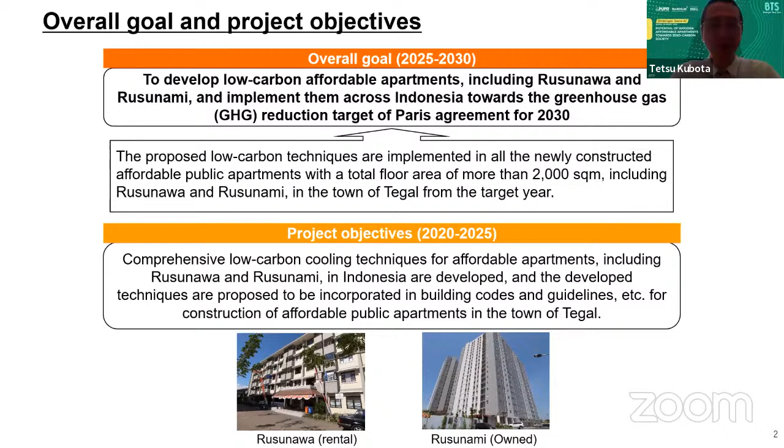This is a 5-year project. We have just entered year 3 of the 5-year project, so just the midpoint of the project duration.

As I mentioned repeatedly, I myself am the project leader on the Japan side, and Dr. Ariel is the project leader on the Indonesian side. We also involve many stakeholders, not only from Japanese universities but also from major Indonesian universities like ITB and ITS, and some important local authorities, national organizations like BMKG, and the Tegal local authority. So this is the outline of the SATREPS project.

As I mentioned, the goal of this project is to develop a new type of low carbon affordable apartment, Rusunami and Rusunawa, in Indonesia, towards the Paris Agreement.

We are doing a lot of things, not only at building scale, but we also try to standardize in different fields. Together with Professor Nimiya from Kagoshima University, for instance, we developed standard weather data, that is, climate. We found that in order to standardize the building, we need to standardize other things at the same time, and climate is a good example.

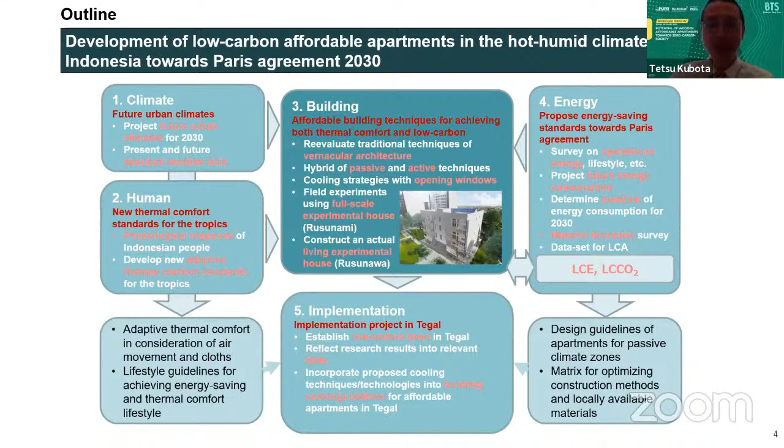Okay, so that is the final goal of the implementation as well. So anyway, we are in the middle of the project, as I mentioned, around 2023.

This is the flowchart of our project, comprising 5 groups as I mentioned: climate, human, building, and so on, until implementation. Now we are doing fundamental studies in different groups, and then we will integrate our ideas into one.

From this year on, we are going to propose the prototype design. At the same time, we will construct the next experimental house B. Eventually we will incorporate all the ideas into the guidelines, SNI. That is the end point of the project.

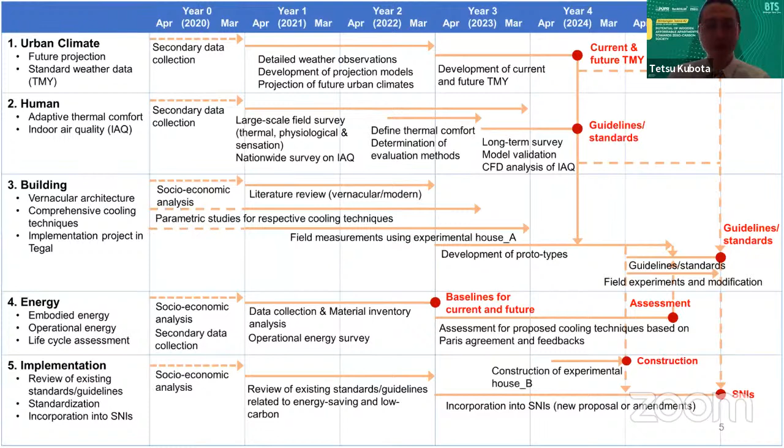So anyway, let's talk about today's topic: experimental house B, the wooden affordable apartment. We are now interested in wooden structure as a future Rusunawa apartment. Why is wooden structure so interesting?

As Mr. Jun also mentioned, the wooden high-rise structure is something of a boom now, all over the world, especially in Europe and also Japan. Many wooden high-rise buildings are being constructed, as you may know. The highest wooden structure can be as high as almost 100 meters, for instance in Norway, and even Canada and so on. These are the latest examples of high-rise timber structures.

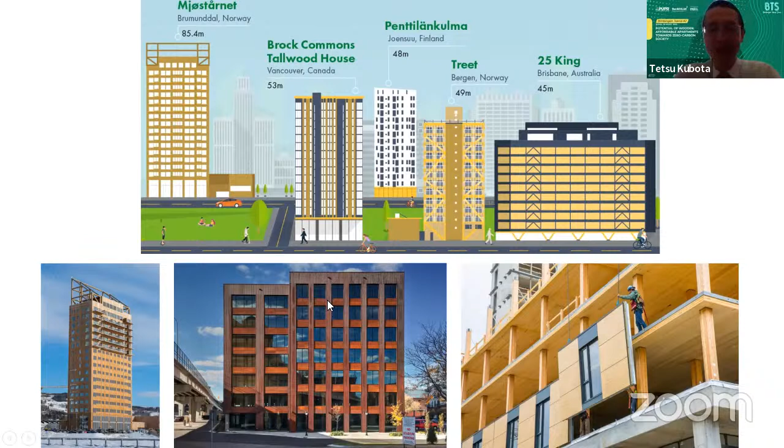I think most of you are already aware of the importance of timber structure for low carbon or even zero carbon, but let's try to understand once again why it is important to think of timber structure as a potential option for low carbon.

This indicates the life cycle of a building. Everyone knows that during the life cycle of a building, we consume so much energy and emit CO2. Starting from the extraction of raw material, then we assemble products and building materials, and further assemble a building. That's the manufacturing phase.

After that comes the longest period, the operational phase. During the operational phase, after construction, we use the building. This is a very long period, 20 or 30 years depending on the building. During this phase we consume so much energy, the most energy in most cases.

After that, we demolish the building, and even during demolition we consume energy and emit CO2, right up until the dump site. Some of the material may be reused, and in that case it goes back to the manufacturing phase. So anyway, this is the whole life cycle, the lifespan of a building.

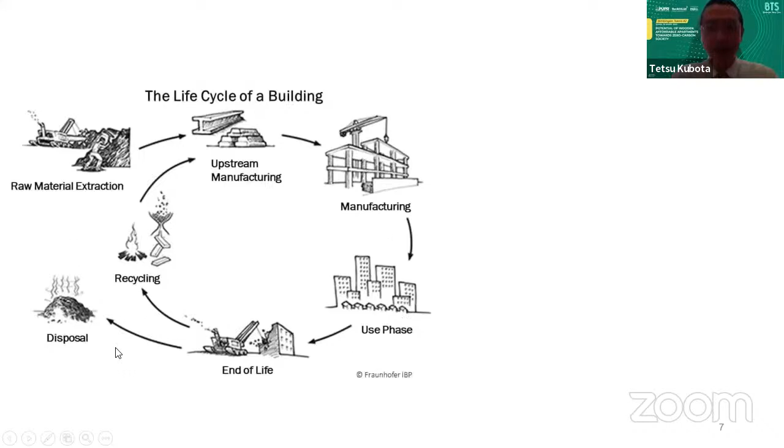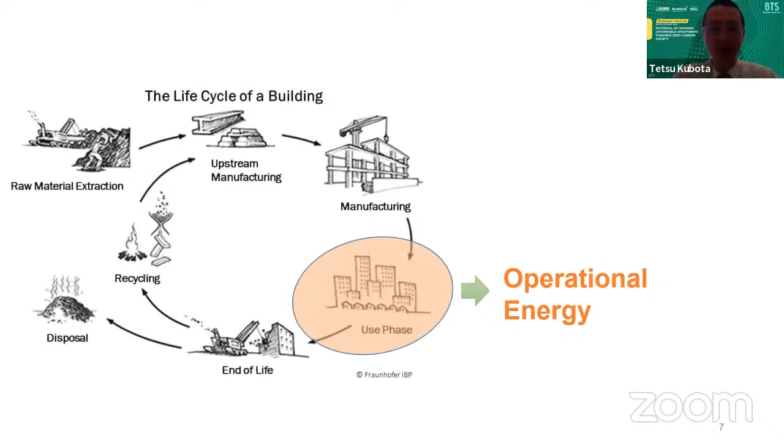As I mentioned, let's summarize the life cycle energy and life cycle CO2 once again. This is called operational energy, the energy used during operation. When we operate the building, we consume so much energy, for instance for air conditioning, cooking purposes, lighting, appliances, and so on.

Especially in the case of Indonesia, a tropical climate, we consume so much energy for air conditioning, cooling, especially space cooling. That's why we now try to promote passive cooling as much as possible, to reduce energy consumption especially for space cooling. Cooking is also a big consumer, and then lighting and appliances as well. So this is what is called operational energy.

Today's topic is rather embodied energy. Embodied energy is the energy consumed during the production of the building, when we assemble and produce a building, consuming energy and emitting CO2 emissions. That is called embodied energy. Of course, in most cases, as I probably mentioned, operational energy is bigger than embodied energy.

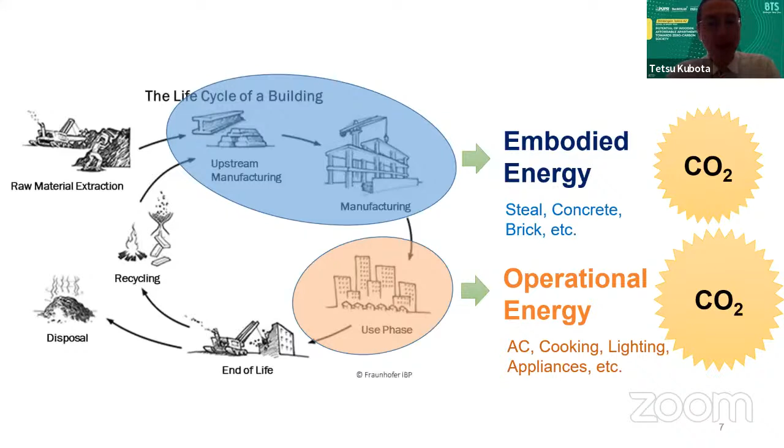So now I'm talking about why timber structure is now highlighted. This is the reason: as long as we use steel and concrete, it is very, very difficult to achieve low carbon, especially zero carbon, because the production of steel and concrete consumes so much energy in particular.

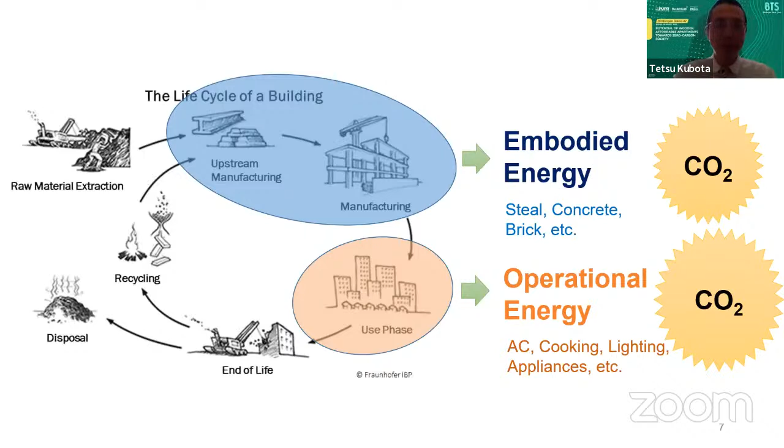So therefore, timber can now be one of the very potential options for achieving low carbon and zero carbon. Because if we construct a nice timber high-rise structure, for instance, we may be able to avoid using steel and concrete much. So that's why timber structure is now highlighted.

So these are some examples in Tokyo. Even in Tokyo - maybe the most advanced country is not Japan but Europe and so on. In Europe, we can see more examples of timber structure, high-rise timber structure, but in Japan as well we have some good examples in Tokyo.

I myself, together with Dr. Ariel, visited some interesting examples of wooden structure in Tokyo quite recently. This is one of them, so-called Flats Woods. It's basically the apartment for staff of Takenaka Corporation, one of the biggest construction companies in Japan. They constructed this apartment several years ago.

As you can see here, this is not a complete timber structure - it's a composite. The main structure is still made of concrete, as you can see here - the floor slab and so on is concrete. But the rest is made of wood, as much as possible.

In Japan, as you may know, fire protection is strongly restricted. So it is very, very difficult to meet the required building codes and standards for fire prevention. So they developed a new structure system to improve fire prevention performance. What they do is insert mortar or concrete inside of the column.

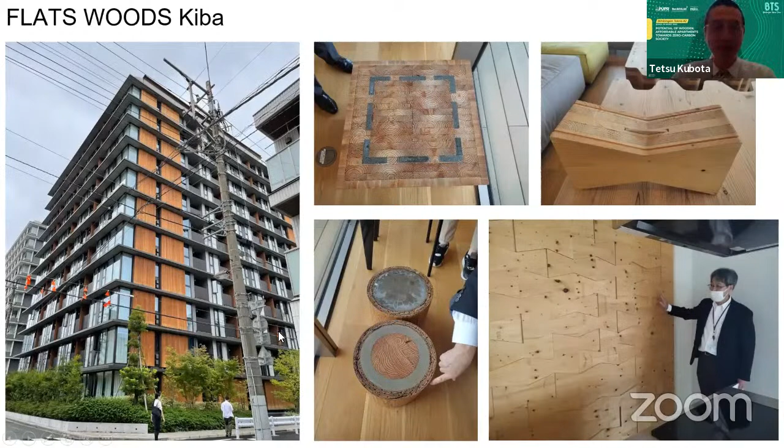This is another example, the building called Kitoki, constructed by a not very major construction company, unlike Takenaka - sorry, I forgot the name of that construction company. Anyway, this is also composite. I think the proportion of concrete is bigger than in the previous example.

As you can see here, the concrete frame is RC concrete, but the inside is wood. The wood part is not everywhere - every 3 floors there's concrete, then inside is wood, inside is wood. In between, they still use the RC frame, as you can see here.

And then the wooden floor is this - this is the plan of the wooden floor. So except for the columns, as you can see here, the inside uses floor timber structure. So inside, except for the columns, is very, very woody. They try to use wood as much as possible.

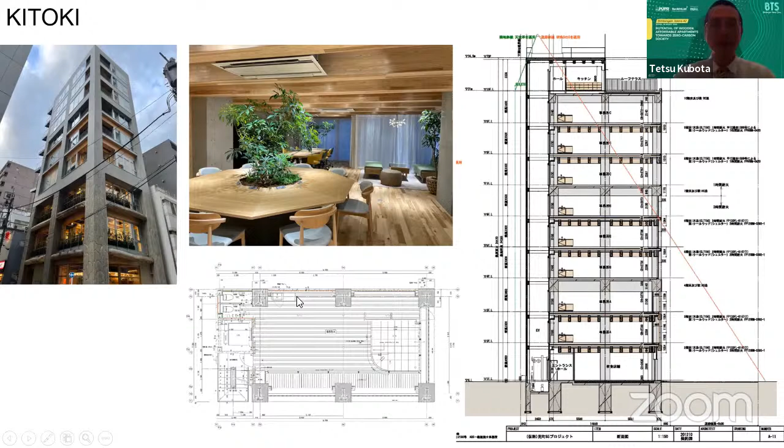So this one is quite a rare case. Unfortunately, we could not visit this example because this building is already occupied by normal people, so we couldn't enter the building.

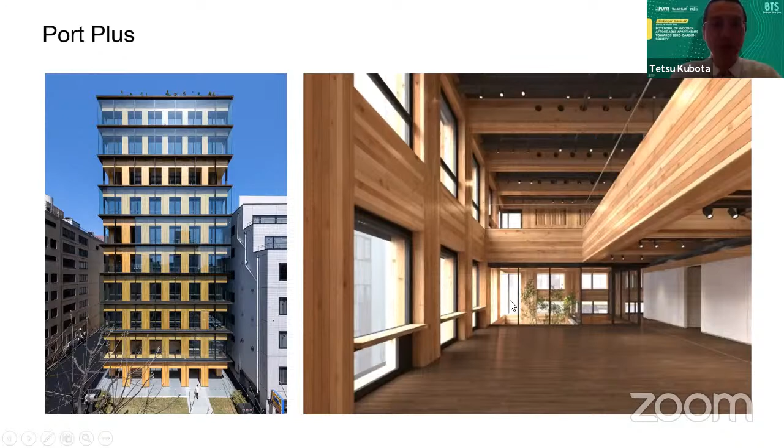According to the website, this Port Plus is complete wood - even for the main structure, they totally apply wood timber, as you can see here. Not only floor and partition and so on, even for the main structure they use glulam, and for floor I think CLT. Totally they use wood for the whole building. This is Port Plus, quite a rare case even in Japan.

Okay, so now I want to share with you the ongoing research I mentioned. We conducted a very small case study together with my students in Hiroshima, calculating how much energy and carbon emission can be reduced if we convert the current RC Rusunawa apartment into a wooden apartment.

Currently the Rusunawa apartment, if I'm not mistaken, is constructed of RC frame and brick or concrete block. So what if we convert it into wooden structure? How much energy and CO2 emission can be reduced? That is the question. Let's take a look at the results.

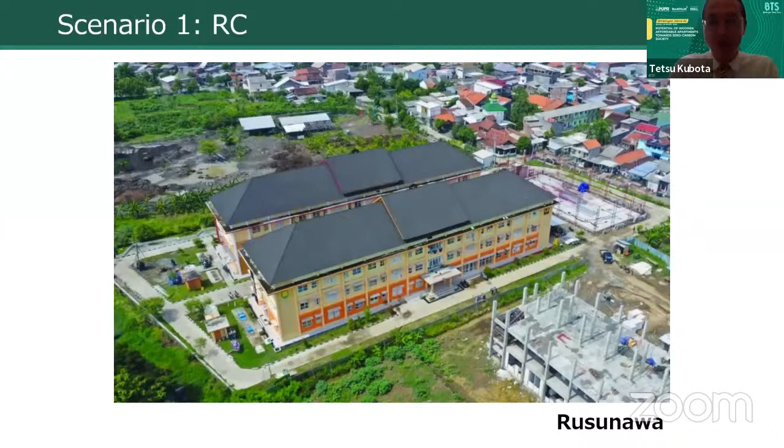The current Rusunawa is this - I like Rusunawa very much. This is perhaps a new type of Rusunawa, I believe. We picked this as an example, and then conducted this case study. So this is the case design.

We conducted two very simple comparisons. Comparison one is in terms of building structure - scenario 1 versus scenario 2. Scenario 1 is actually the current Rusunawa, with RC frame plus brick wall or concrete wall. That is the current condition, let's call it scenario 1.

Scenario 2 is the wooden structure - we completely convert the current Rusunawa into timber structure. So that is scenario 2, and we purposely use domestic material for this scenario.

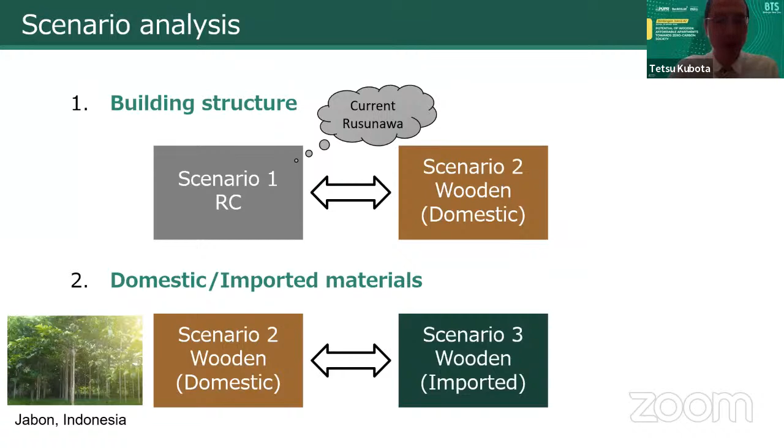Comparison number 2 is we compare in terms of domestic material versus imported material. For domestic, scenario 2, we apply domestic material - we choose jabon, which as you know is very popular in Indonesia, a tropical tree. Jabon is actually a good tree, so we can use it even for building structure. It's fast growing, and we just assume we use jabon for building structure in scenario 2.

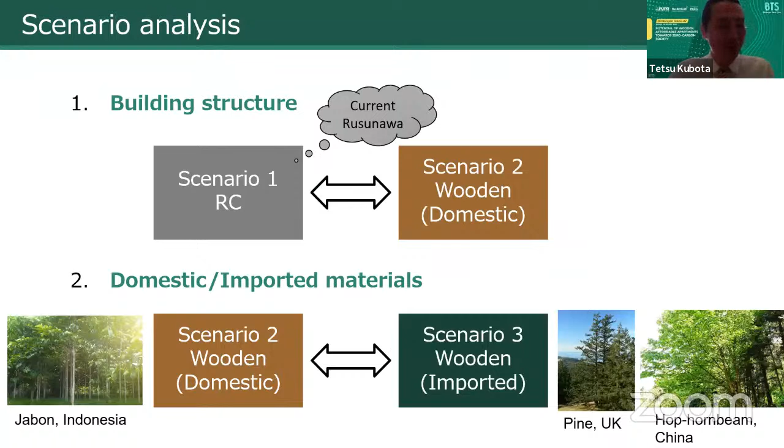Scenario 3 is where we purposely use imported wood material from China and Europe - let's say pine from UK or hop-hornbeam tree from China. These are also normally used, as you may know. So that is scenario 3. Then we just compare which is more energy consuming, or which has higher emissions, in terms of both emission and energy.

So my students first constructed the so-called BIM model. Scenario 1 is the current Rusunawa - as you can see here, the RC scenario. We emulate the normal Rusunawa, as I mentioned: 4-story, as you can see here, plus foundation, as you can see here.

For the wooden scenarios, 2 and 3, we don't consider the foundation - though I think this is perhaps too optimistic, we should probably still consider some foundation. But anyway, in this simulation we don't consider the foundation, and we convert the concrete part into wood totally. That is scenario 2 and 3. Of course the apartment design is completely the same: 4-story and 2-bedroom.

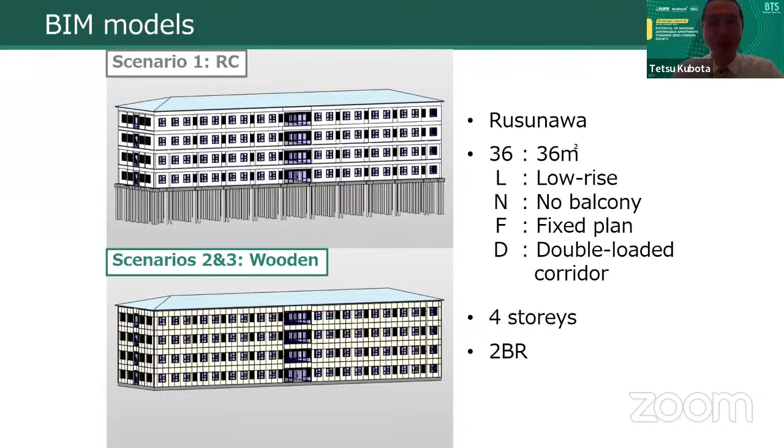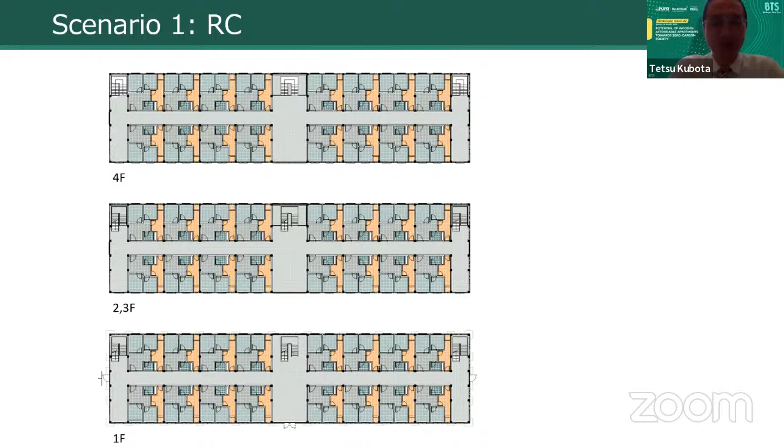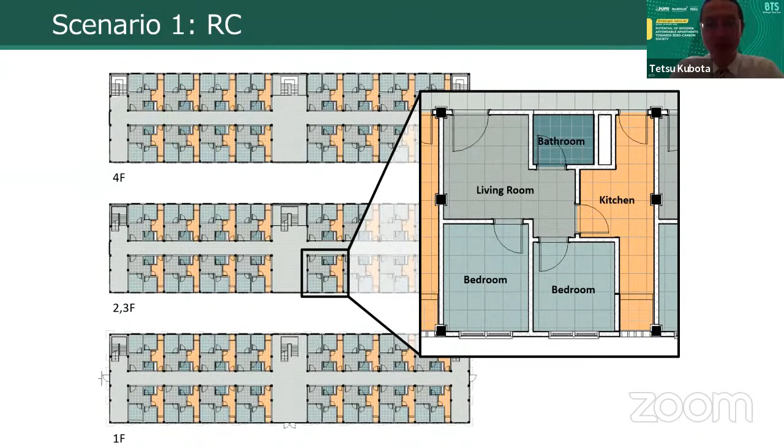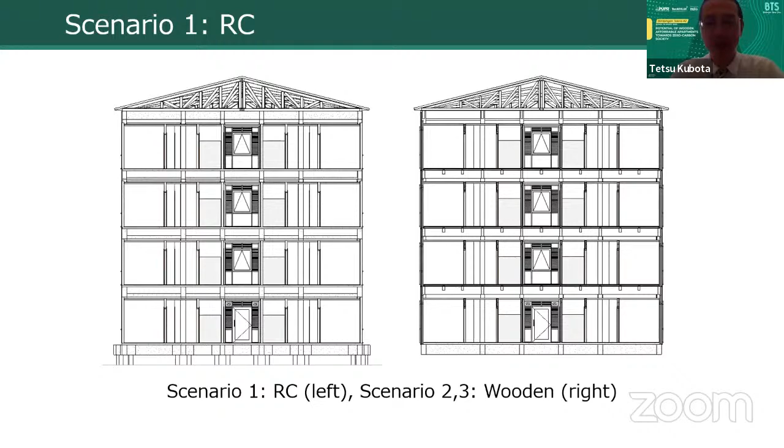This is inside, so we just emulate the normal, ordinary Rusunawa new type apartment. The inside room allocation is shown here, just for your information. I believe this represents the current Rusunawa arrangement. The left-hand side, scenario 1, is the current normal Rusunawa, all concrete and brick. The right-hand side is our proposal, the timber structure scenario, where we convert it totally into wood.

From here, I'd like to show you the results of our calculation. First, this shows the quantity, the material quantity per area, so the amount of material used for each of the buildings.

The gray indicates the current Rusunawa apartment, and the green indicates the result of our proposal, wooden structure. In the case of the current Rusunawa, RC concrete and brick building, needless to say, we use so much concrete, cement, sand, gravel. As you can see here, we also use a certain amount of steel, needless to say, for the reinforced concrete and also foundation. So here is also an important point. Then of course we use aluminum for windows etc, and also the roof structure, I believe, and so on and so forth.

Then we just convert it into wood. In that case, needless to say, we don't use concrete much, as you can see here - that's green, scenario 2 and 3. Instead, we use so much plaster board for partitions and so on, that's why the amount of plaster board is suddenly increased, as you can see here. And steel also - we can dramatically reduce the use of steel if you convert into timber structure, needless to say. So this looks tiny, but it's quite a big reduction.

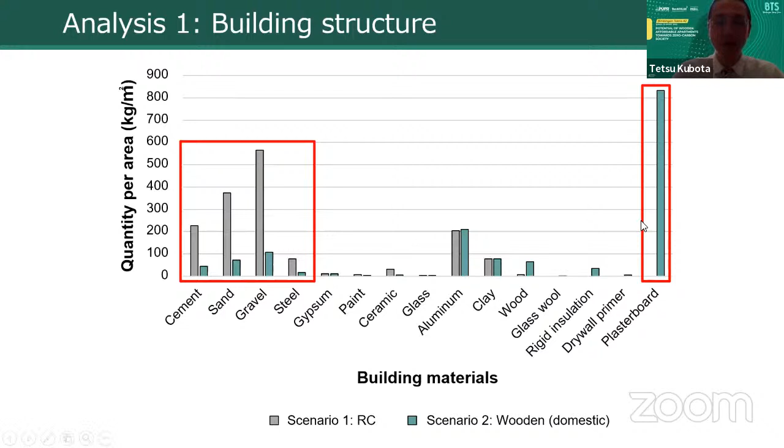So that is also an interesting point. This is just a summary, repeating the same information. This is a pie chart showing the proportion of material used for scenario 1, and this is for scenario 2, the wooden construction. In the case of RC, current Rusunawa, steel is, in terms of the quantity, the weight in kg, only 5%.

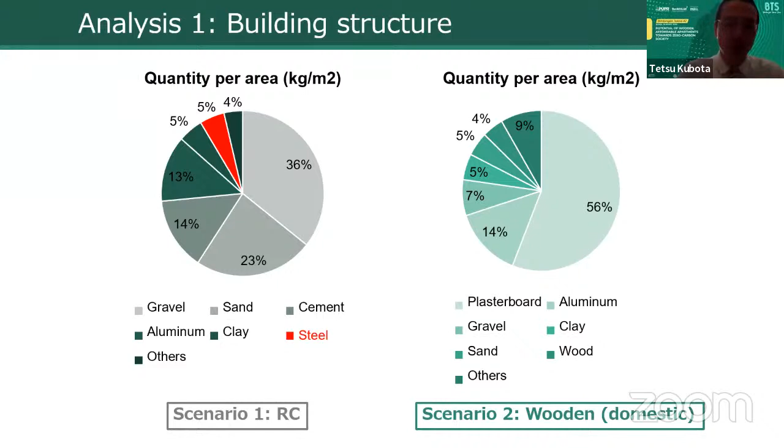But in the case of wooden structure, almost 0. Only 5% in terms of quantity, but as I mentioned repeatedly, that consumes so much energy and emits a huge amount of CO2. So 81% of the CO2 emission comes from the production of steel. And in the case of wooden timber structure, only 45% of emission is caused by the production of steel. So therefore, once again, steel production as well as concrete production is a very important key in terms of CO2 emission.

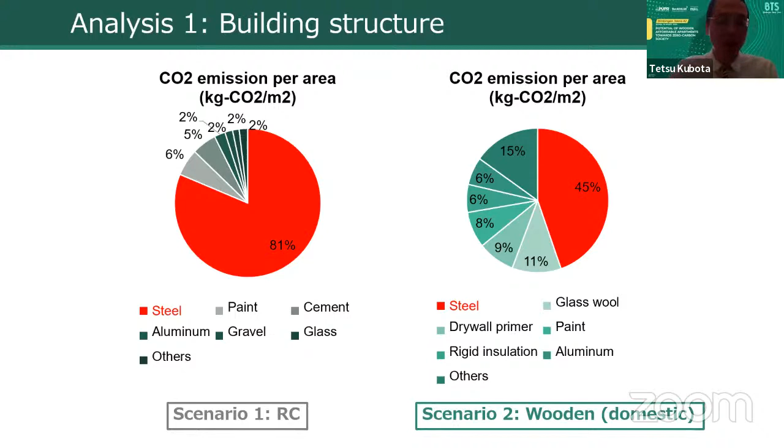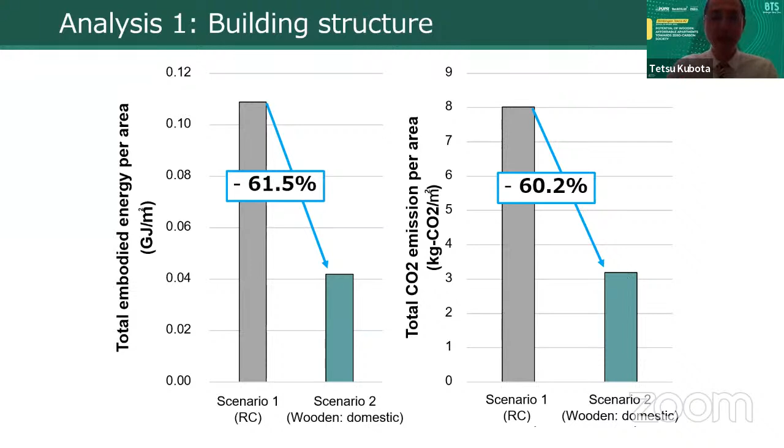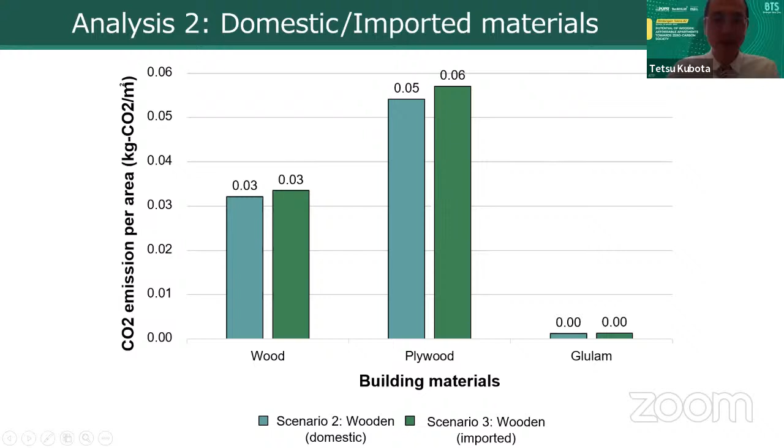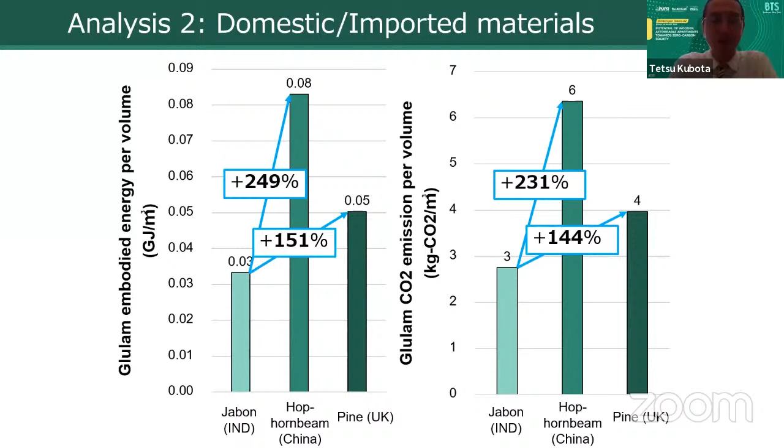This clearly shows, as expected, that it's very important to use local domestic material rather than import wood from overseas. This is normal, right, because we need to transport it, and we need to process it, and everything will consume energy. So it's very important to use local domestic wood material as much as possible if you wish to reduce CO2 emission.

This is talking about the carbon storage effect. Carbon storage means that the tree forest contains carbon inside. If you burn the forest wood, this contained carbon will be released into the air. But if the wood is still there, as a building, the carbon inside is stored - we can store the carbon inside the material. This is the so-called carbon storage effect, which depends on the density of the material.

If you use Jabon, for instance, it's a fast-growing tree, very good, but the density is not as high as the pine or hornbeam tree. So in terms of the carbon storage effect, imported material - the high-density tree like pine or hornbeam - is in a way better for the carbon storage effect.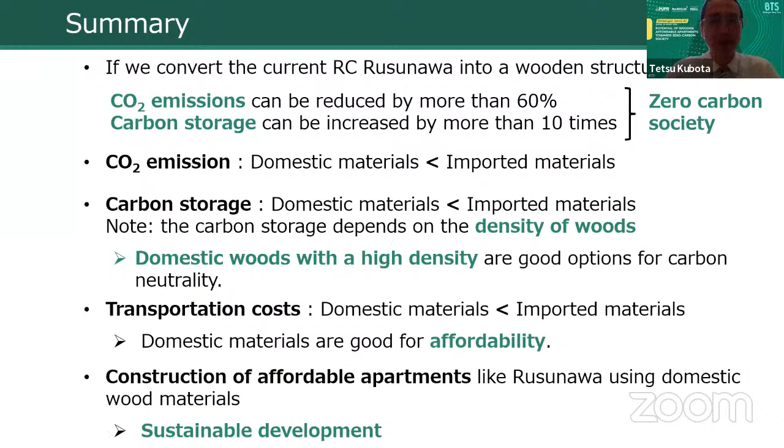From here, I want to share with you our new idea. But before that, I want to share the current, already existing experimental house. Let's call it experimental house A. Next one is B.

A is already constructed, as I mentioned repeatedly. I hope some of you already visited our experimental house. This was constructed together with PUPR, Dr. Ariel and the team, and also ITB, designed by ITB as well. This was constructed thanks to PUPR and the leadership of Tegalu local authority. It now exists in Tegalu, and the concept is this.

This experimental house is aimed at rather Rusunami apartments, not Rusunawa. Although this building is only a 2 or 3 story building, the target of this building is a 20 or 30 story Rusunami apartment. Therefore, our assumption is the income level for this building is not as low as Rusunawa, but middle class.

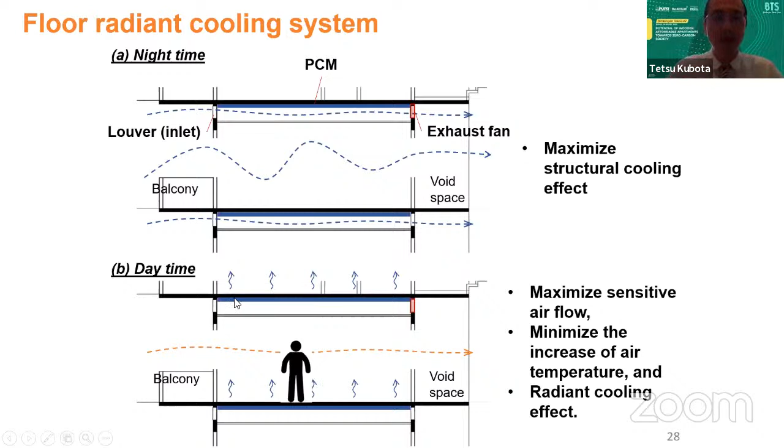Professor Asawa most probably explained the detail of this cooling system several months ago. But anyway, this is the detail of this cooling system. We conducted this kind of experiment and simulation together with PIT and the PUSKIM members, not only in the garden but also in different places together with the YKKAP team. These are some of the results, but I can skip because Professor Asawa already explained the results previously.

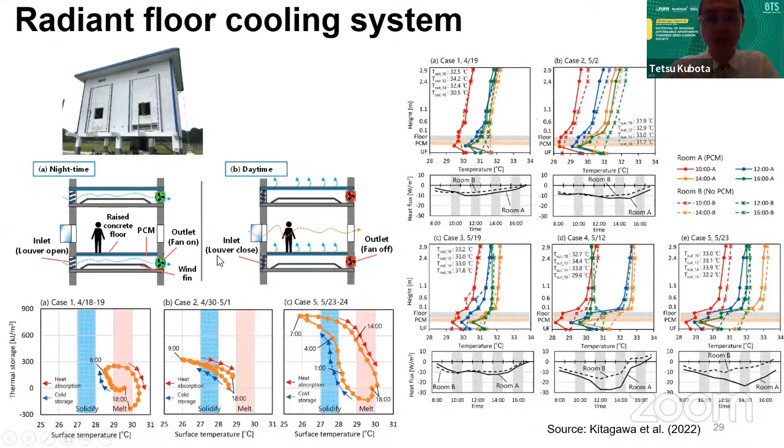Next topic is our research topic. Yes, we are doing ventilation research, as you may know. So still I'm talking about experimental house A, and one of the important concepts for experimental house A is natural ventilation. So we designed the vertical void inside of the apartment.

Why vertical void, actually? I'd like to tell you again why we designed the vertical void inside the apartment. For me this is very important information, but for you perhaps very normal. Anyway, we found that most of the Indonesian Rusunami, especially Rusunami apartments, are designed as double-loaded apartments. So in Japan this is very surprising, actually.

In Japan, most apartments are, if I'm not mistaken, rather single-loaded. Why is single-loaded typical in Japan? Because we need to receive sunshine, needless to say, especially the winter sun for heating purposes. So double-loaded cannot be accepted by the people. We have to orient the apartment towards the south to receive the winter sun for heating. That's why most apartments in Japan, and I think in the northern hemisphere generally, are single-loaded and oriented towards the south, as you may know.

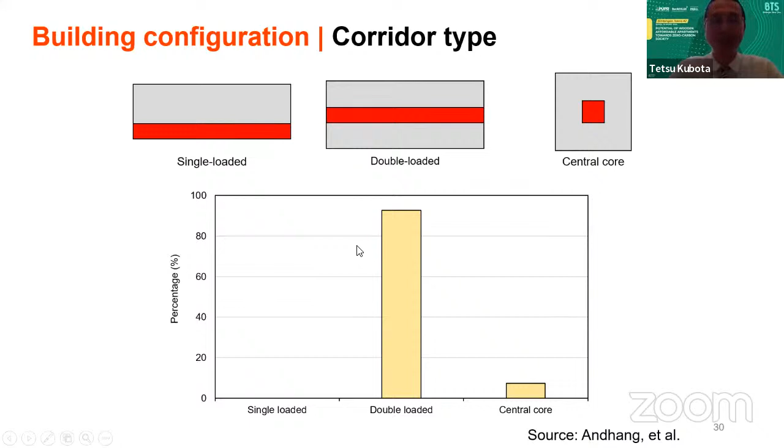Interestingly, though, the double-loaded apartment's ventilation can be poor, as you may know. Especially on the leeward side of the apartment, we cannot give good cross ventilation, because people tend to close doors on the corridor side. So especially on the leeward side, they cannot enjoy cross ventilation. That's a big problem for this kind of double-loaded apartment.

So we propose to design a void space inside the apartment. If we design the void space in between the apartments, our idea is to also design a wind catcher at the edge of this piloti space. If so, we can give a nice increased breeze from downstairs to upstairs. That is the idea of our experimental house A.

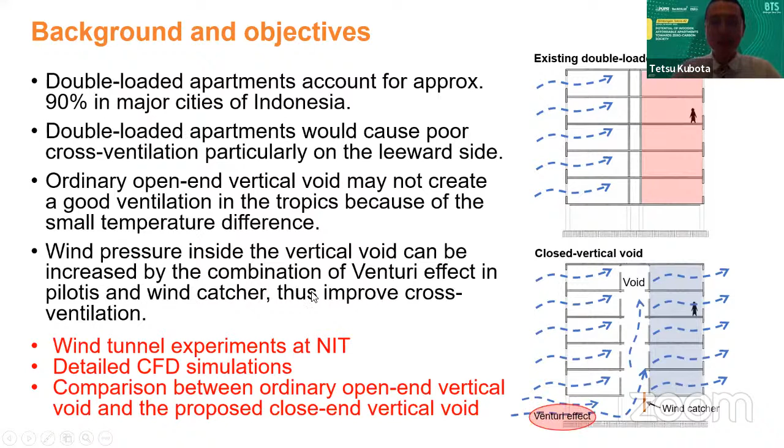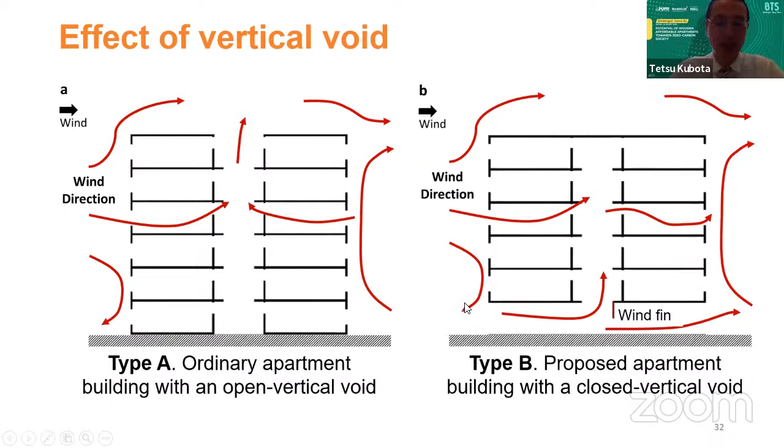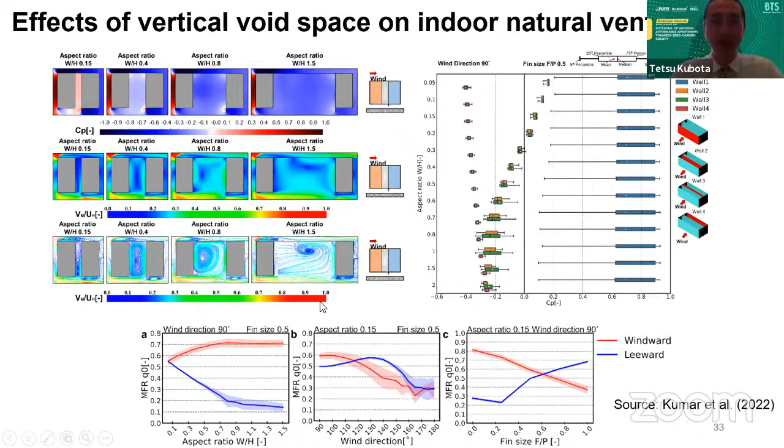But maybe because of time constraints, I'll try to skip the detail. Interestingly, in our case we can enjoy better ventilation than the ordinary void apartment, according to our study. These are some of the detailed simulation and experimental results. If you're interested, please take a look at our journal papers already published, or please ask me and I'd like to tell you the detail later.

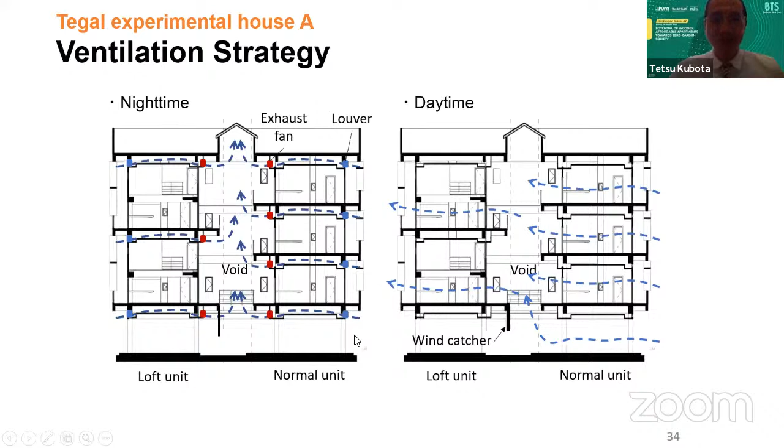So anyway, by making use of these design concepts, we constructed experimental house A. This is just the environmental concept for house A, and this is the outside—I have just come back from this place. And this is the inside; we designed the vertical void as I mentioned, based on the simulation results.

Now we are doing the field measurement, and it seems that the void space and the wind catcher are quite effective. Even on the leeward side of the apartment, we can enjoy nice cross ventilation thanks to this design concept.

So this is talking about the next experimental house, B. As I mentioned repeatedly, now we are thinking if we construct this new experimental house as infrastructure. The site is the same, this is the exact site, Tegal. Thanks to PUPR, we obtained this huge land, and we can use it thanks to the local authority as well.

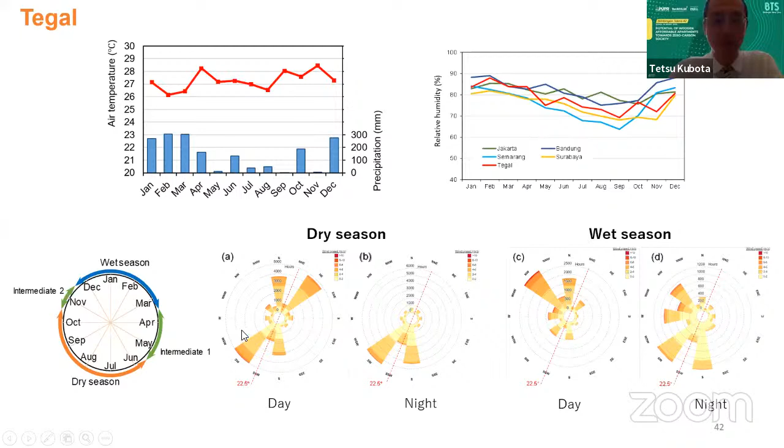This is the sea breeze, especially during the daytime. So the site receives relatively strong sea breeze from the north, but not exact north, slightly northeast, as you can see here. And the seasonal wind direction is actually from the south. So therefore the important axis here is north to south, the important axis for the building in order to receive the nice wind.

Anyway, this is the tentative but basic concept for the next experimental house. We now propose a composite structure, so it's not purely timber, because we need to worry about the termite and so on, and also the cost. So we think it is a bit too early to propose a full timber structure, therefore we would like to go for...

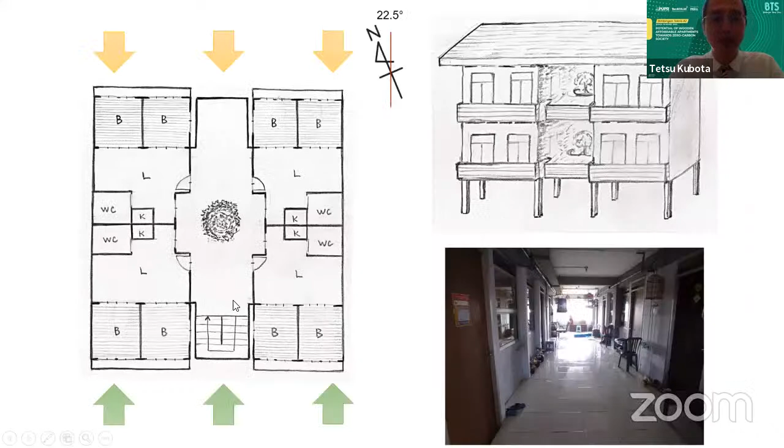If we connect these, this is the resultant Rusunawa. But anyway, we cannot construct such a huge Rusunawa because of the cost constraint, so we just pick up one block, and this is the proposal of the experimental house. My idea is actually, so this is a Malay house, as you know.

In the tropics, the semi-open space plays an important role. Semi-open space means this kind of shaded space, a deep eave, and also this kind of large garden, and so on. These semi-open spaces play a role as a thermal buffer, nicely reducing the air temperature, and also leading the nice winds indoors. So therefore these semi-open spaces make the indoor comfortable.

So this design concept is: the core space is surrounded by semi-open spaces. This wooden part is just like the semi-open spaces, and then it protects the inside from the outdoor severe weather conditions.

So that is one of the design concepts of this experimental house. This next part, if you are familiar with building science, you can easily understand. The concrete part has a stable indoor temperature, thanks to the thermal storage effect.

So the temperature profile inside the concrete part would be like this: during the daytime, if the outdoor temperature is 32 degrees Celsius, the concrete part's daytime temperature can be much lower than outdoors, let's say 29 or 30 degrees Celsius.

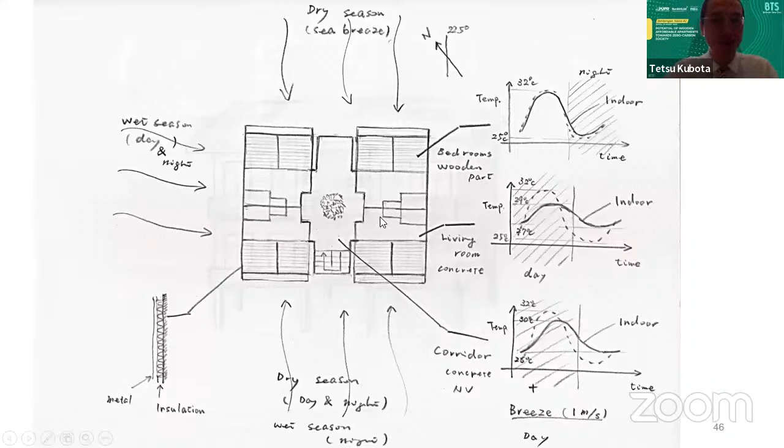Now we are interested in working with some local architects like Mr. Yushin, who Dr. Ariel kindly introduced me to. As you know, he's a famous architect with experience designing Rusunawa in Jakarta and so on. He's also a specialist in wooden structures, so I think he's one of the good architects for our project.

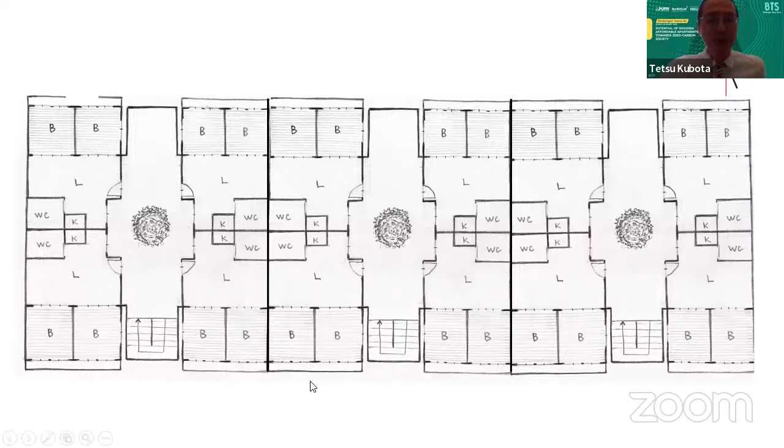All right, I'm sorry for the delay. That's all from me. This is an ongoing project, so if you are interested in this experimental house project, please join us. Thank you very much.

Thank you very much, Professor Kubota. That's very interesting, complete information and so on. But as I mentioned before, and as Professor Kubota expected, we very much welcome inputs, comments, etc.